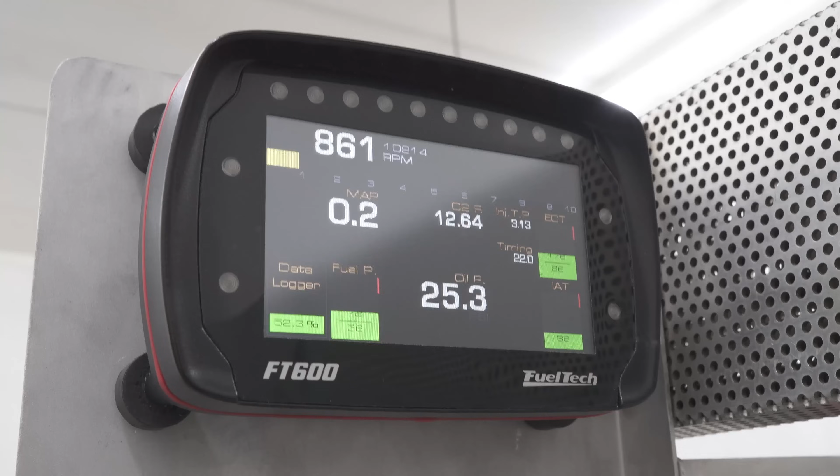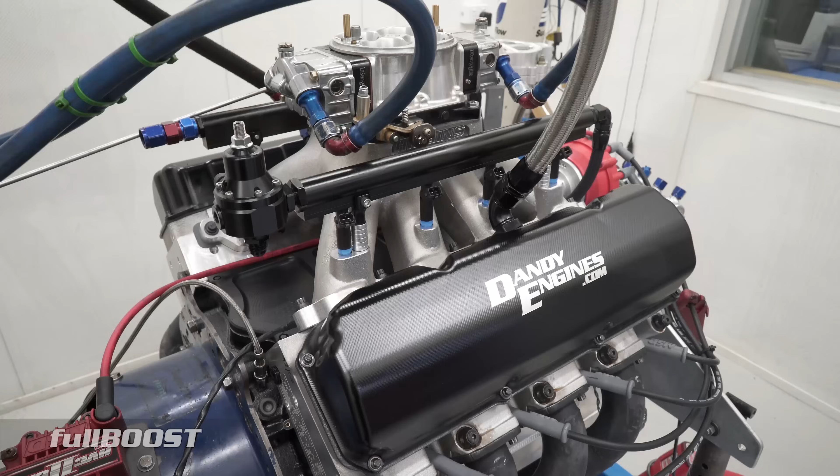Frank, we've done a few of these high output small block Ford engines here at Dandy Engines. Tell us about this combination and what we're doing today. It's no different to our run-of-the-mill 800 horsepower small block Ford. We just ran it in with a carby, and we wanted to make a quick video to show people how easy it is to put on an external computer EFI and wire it up.

It's not that daunting, and anyone with a little bit of know-how at home could probably do this themselves. That's what we thought we'd show you. It can be plugged in and have the engine running within an hour. It's a bit easier on an engine dyno. Of course, but it's not that hard to plug in, and we'll show that in the video.

We're going to be using a carby style inlet system still with the EFI. We're not switching to a fancy manifold, just a throttle body, and it doesn't have any fuel bowls or nothing. So it's basically just going to let the air in, and the TPS will read that.

Now the objective here isn't trying to make more power, it's just about showing how easy it is to convert, and obviously the advantages you've got with running an EFI system. We just want to show people how easy it is to remove a carburetor, plug the fuel system in for EFI, and then show an EFI system being plugged in.

All right, well let's just run it up now quickly with the carburetor, and then we'll show some of the parts we're going to put on the engine. Let's do it.

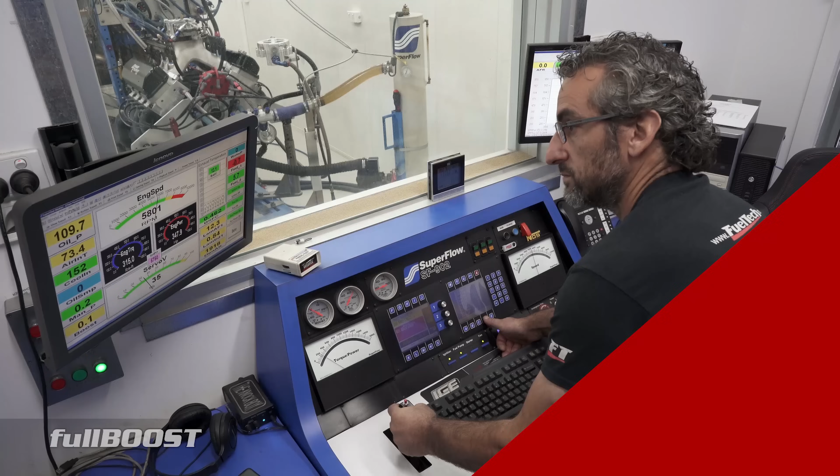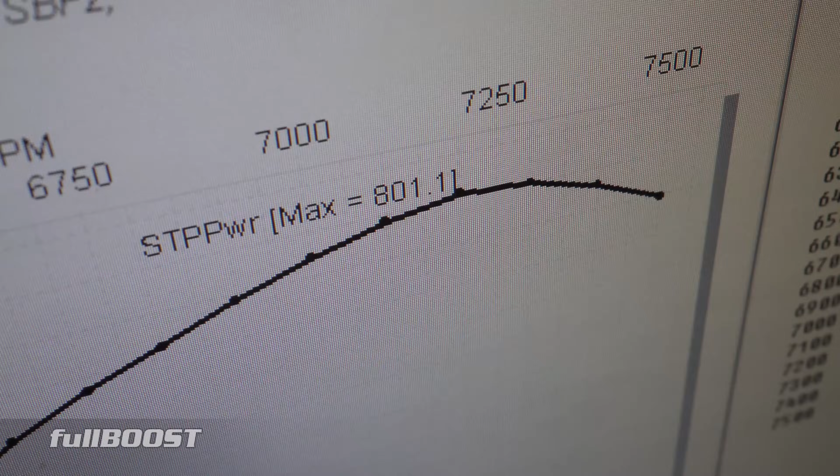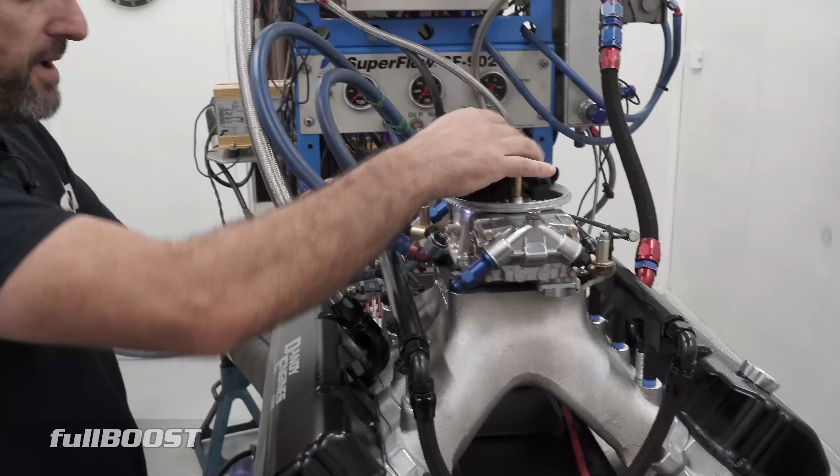So we just did that run with the carby. We weren't chasing anything, it was just really running the engine in, pretty much the first or second pull on the engine. It's about where it should be. Like I said, we're not trying to make power, we just want to show everyone how easy it is to plug a harness in.

Now obviously we've saved a bit of time because we've already got the manifold ready here. So Frank, just run through some of the parts we're going to be using today on this engine.

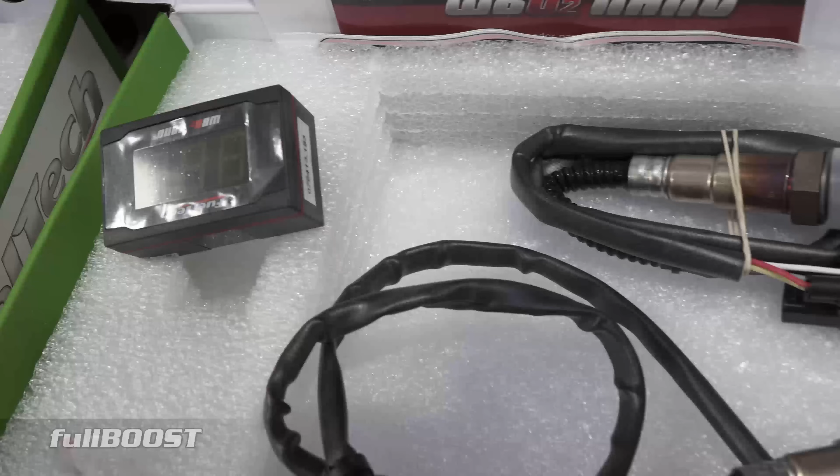Well, we have a pre-made harness that's already terminated for all the injectors and all the sensors. Then we have wideband nanos, which are basically air-fuel ratio readers, and they convert the signal and send it to the ECU for data logging.

We've gone with the FT Spark on this one, so we don't have to run an MSD box or nothing. It just simplifies the whole system.

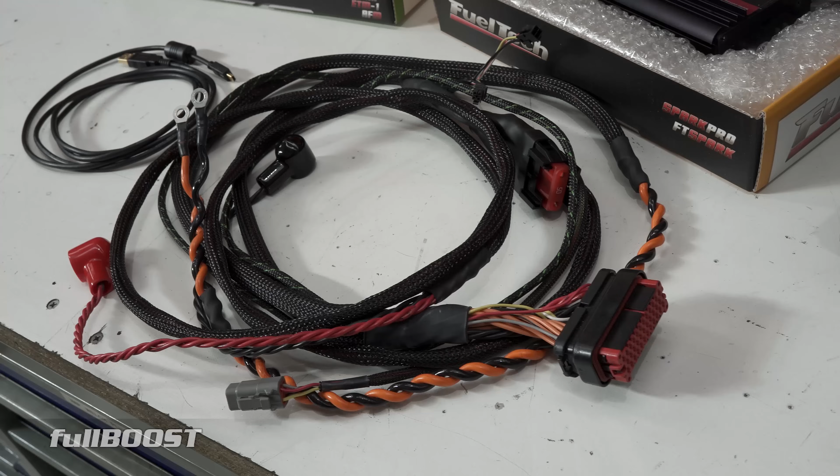And the FT 600, that's a choice of the customer. Depending on the customer's needs, you don't need to go for the highest end product. No, you can start with a 450, it just means it's got less inputs and outputs. And then the 550 will have a few more again.

And here's our throttle body. Basically we're going to remove the carby, and we've still got the same butterfly combination, we just plug it in with a TPS and away we go.

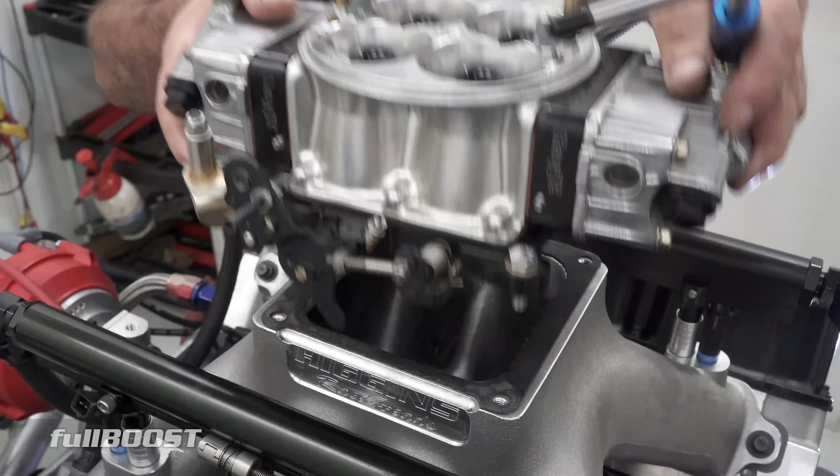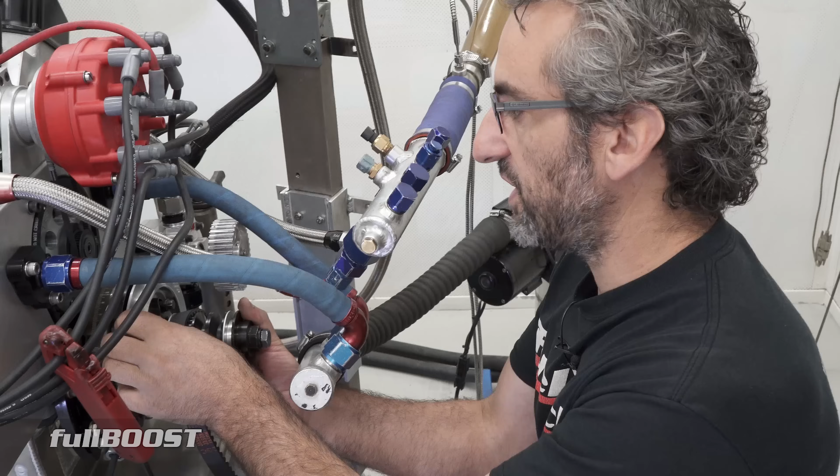So what we're doing here is we're going to sync, or basically set the reference up so the computer sees 50 degrees on the balancer, so we can sync them all together and adjust the timing, so the timing will be synced on fire up.

So basically when we get this off, which normally just falls off, there you go.

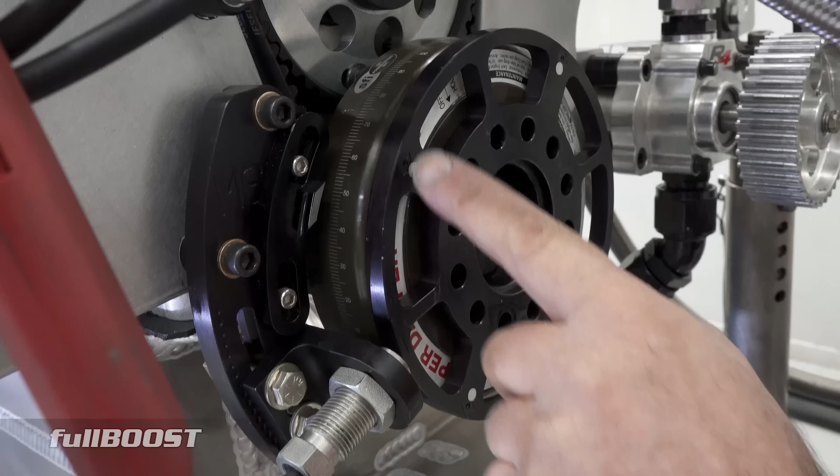At 50 degrees after top dead center, we need a magnet to line up. As you can see, we're in between two magnets. That's the closest magnet now, so we're going to put it in place.

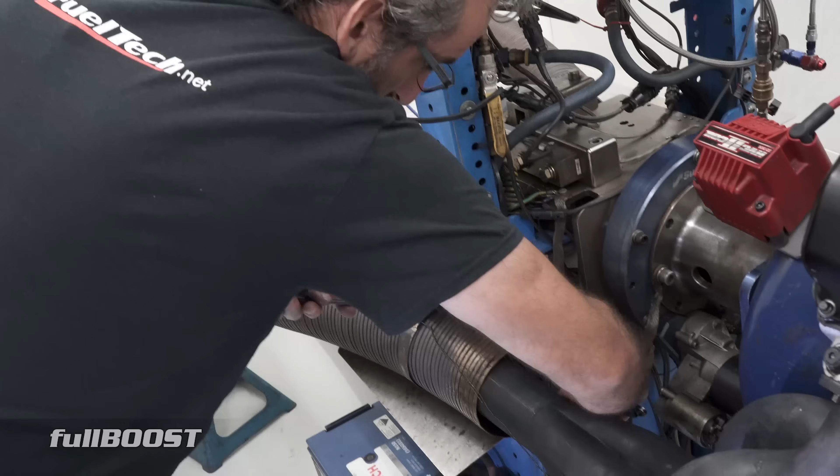So Frank, moving to EFI, we're going to have to put in an O2 or a couple of O2 sensors, yeah? Well, minimum you just need one, but in this case we're going to put two because that's what comes with this kit. We're just going to remove the carbureted one and add the EFI one so the unit can read it.

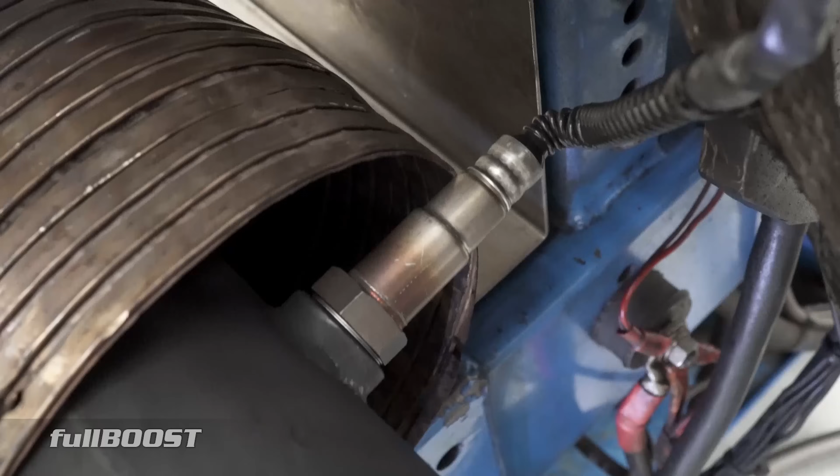Got a few wires there, mate. Yeah, it looks a little untidy until you get it all apart. It certainly looks more daunting than it is, doesn't it?

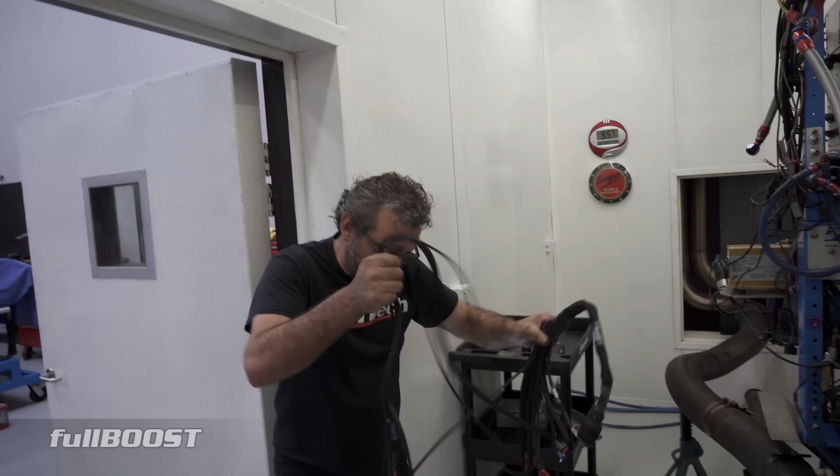No, but everything's terminated. So this is what we wanted to show you, how easy it actually is once you unpack it and unwrap it. Probably one of the easiest harnesses that you can plug in yourself. We've had a bunch of customers wire up their own cars, and they've enjoyed it because now they understand where everything goes and what it does.

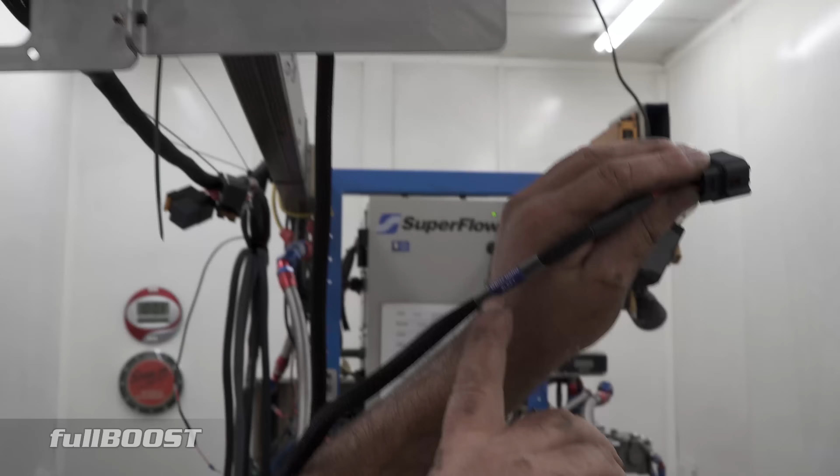So basically we're going to pick the, there's an A and B. So we have a left and a right, which is labelled on the actual harness, so it's pretty much idiot proof. Put that in there, plug that in there.

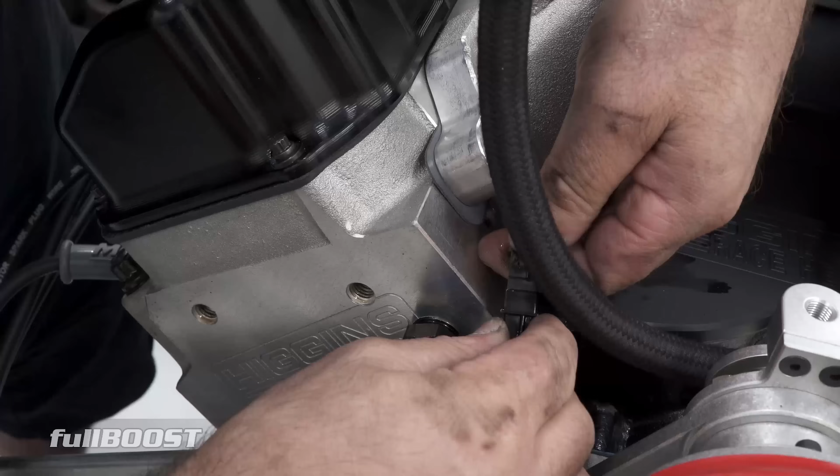So we have a crank trigger, we'll run through the manifold. So that's an FT Spark. That's basically the replacement of that big old box.

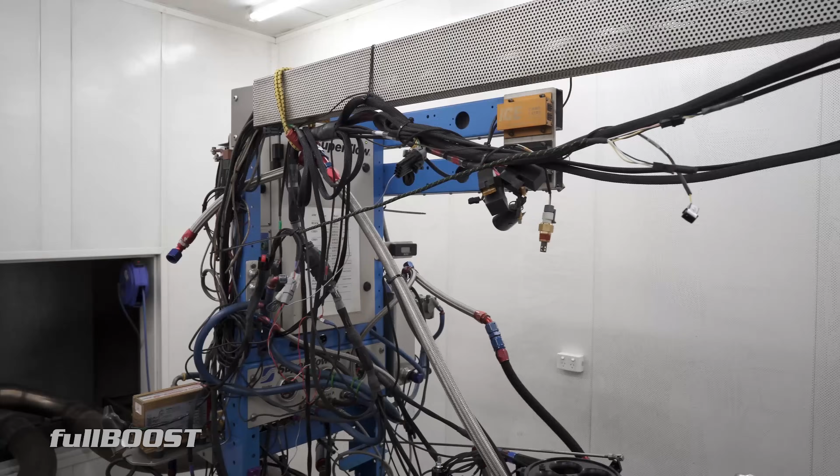So Frank, we've got the whole harness hanging up here. Now it does look like a lot of wiring, but we're not obviously using all of it today. Do you want to just point out what you need to connect up just to get this thing running?

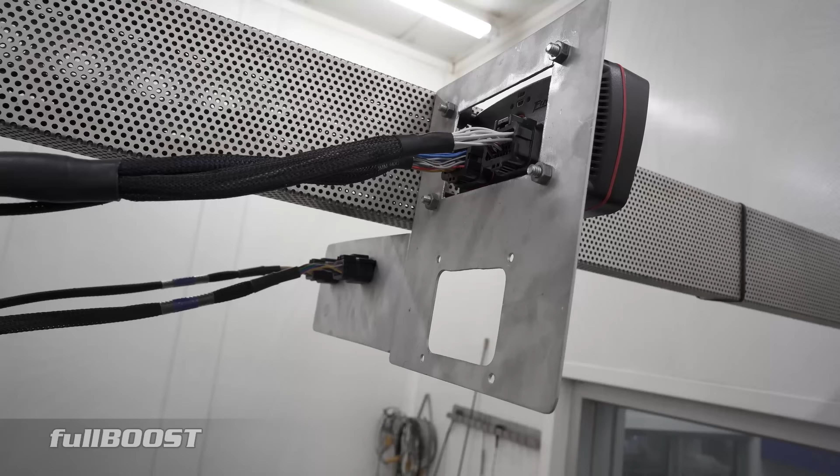So we'll start off with up here at the ECU. There's two plugs, plugs A and B, in the back of the ECU. Then you have the two nanos, which are labelled left and right, so they're plugged in now. They're your wide bands. Then we plug in air temp sensor.

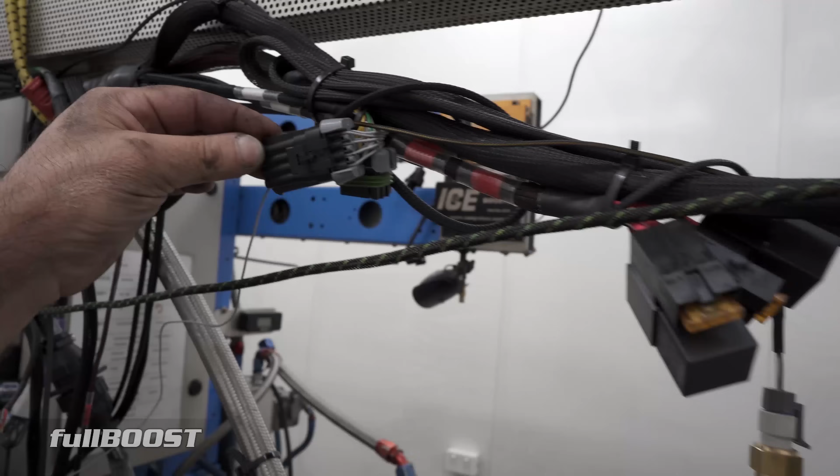This one here is just showing it's using one output to trigger the spark. And then you have the most important one, an ignition wire, 12 volt ignition for that from the dyno. And I'm using it, this is the dyno, 12 volt. We're going to turn on the actual ECU and the FuelTech spark box.

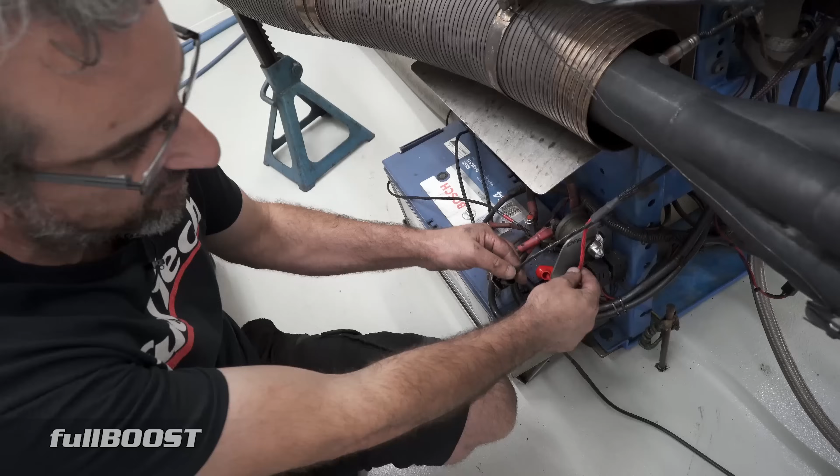Then you have basically battery power, so you have a red positive that runs all the way to the battery and a negative. Same with the FT Spark, they have their own power supply. FT Spark has two wires going to the coil like that. And keep in mind, it's only a single coil deal, so we're trying to keep it very simple.

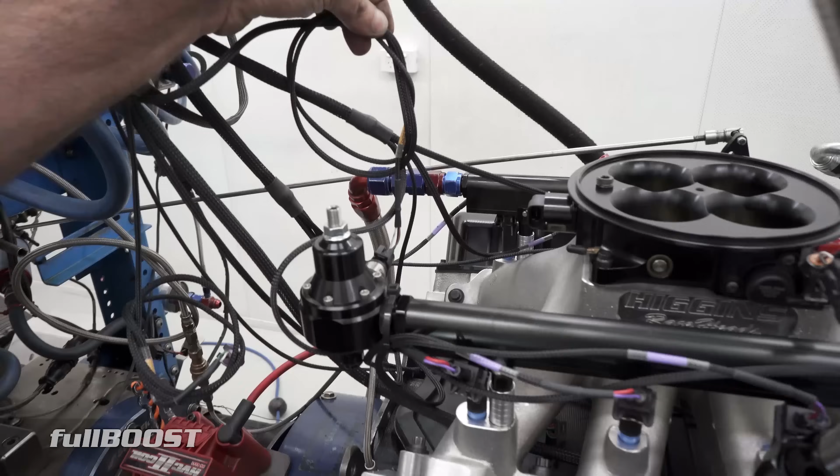We've plugged in a fuel pressure sensor, so we can data log fuel pressure. TPS for throttle position. 1, 2, 3, 4, 5, 6, 7, 8 injectors.

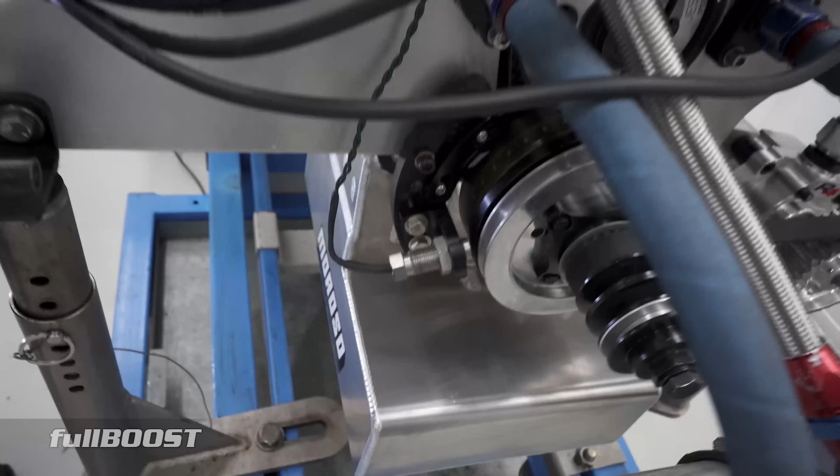And we've plugged in the other end of our nanos to the O2 sensor. And a crank trigger, so we've plugged the crank trigger in. We're not using a cam sync, we don't need to for this combination.

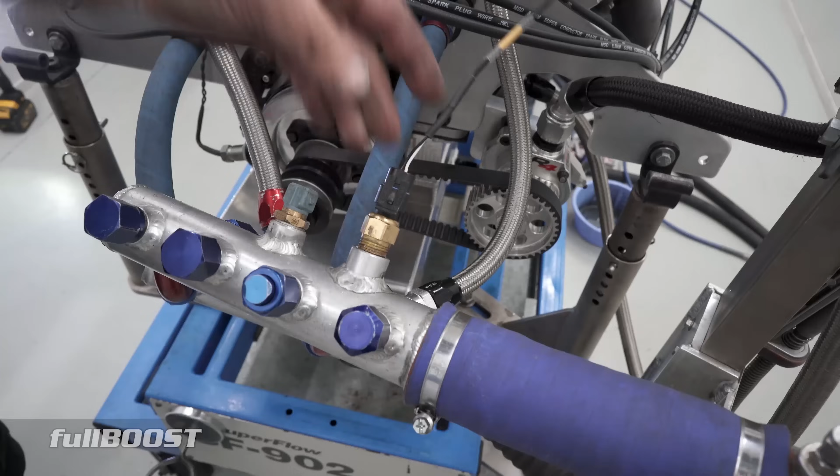And looks like you put in a water temp. And we've put in a water temp sensor and an oil pressure sensor, so we can data log everything. Even though the dyno has it, it's just nice to run it through the ECU.

The harness has its own fuses and relays. I mean, if you have fuses for other things like water pumps, and relays for trans brakes and so on, but all the harness to start the motor, everything you see was wrapped up in that harness.

And there's a lot of things we're not using. I've had to wind a lot of things back, like back pressure and so on.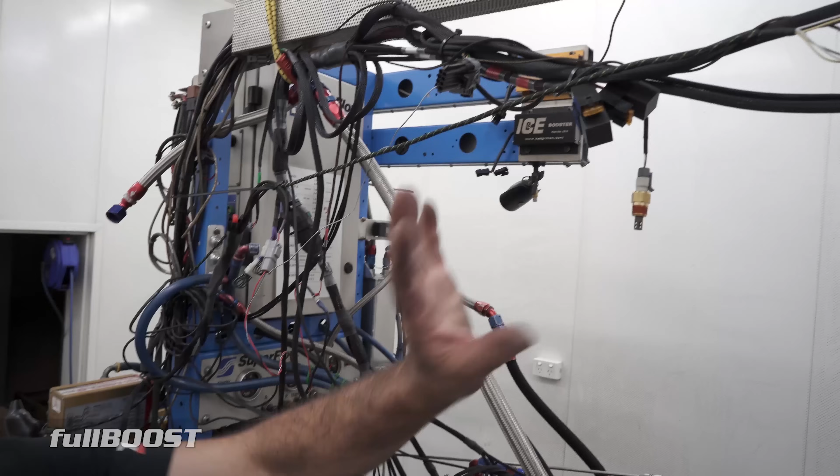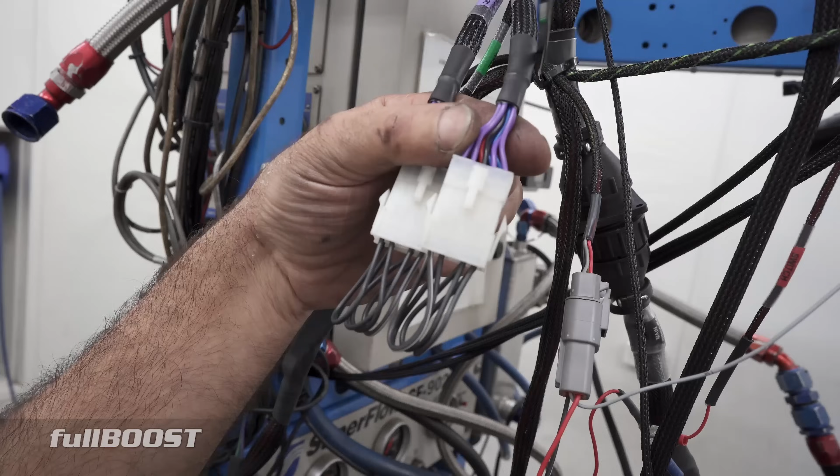This unit is strong enough to drive a high impedance injector. So because we're not using low impedance injectors, it comes with two plugs and you can just loop them. But if we're going to use a low impedance injector, like I use on our XW that makes 2800 horsepower, then we have like a 4 amp box to help amplify the power to the injectors.

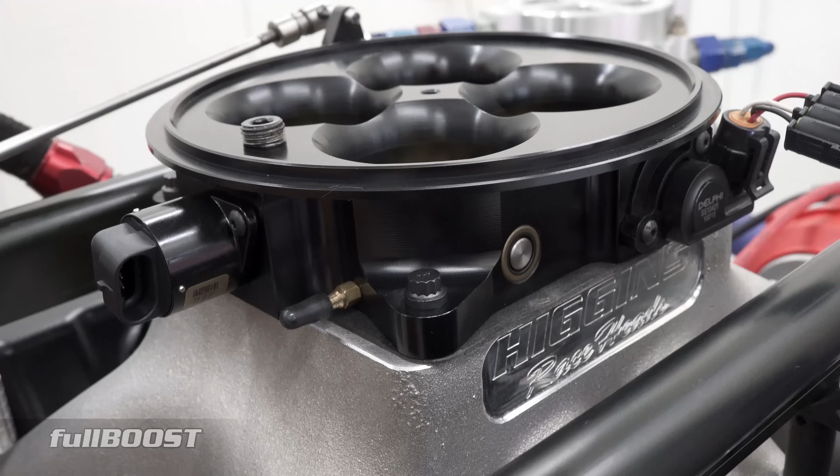Yep, so this is ready to start up. We're going to draw a map based off the carburetor numbers, how much fuel the engine used, and we know the timing, so we should be able to load those two things in.

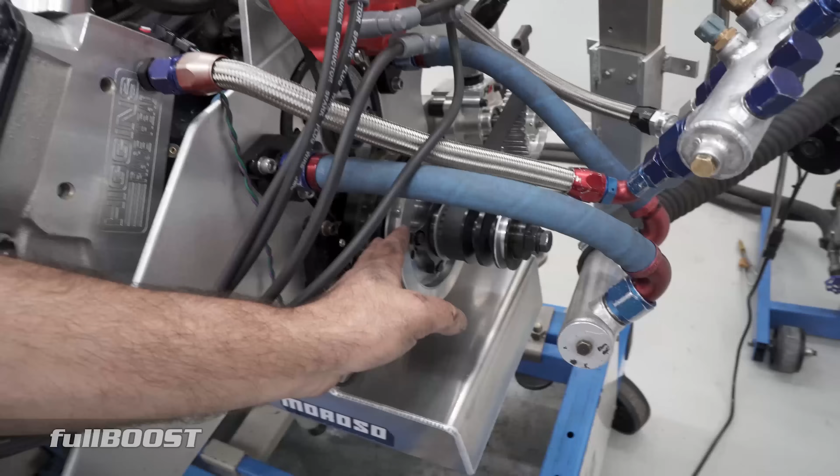Just allocate that one wire to ignition number 1 on the outputs, and we're going to make sure our timing syncs up. Basically we changed the crank trigger before from a conventional MSD box set up at whatever timing, 25 degrees we were trying to shoot for.

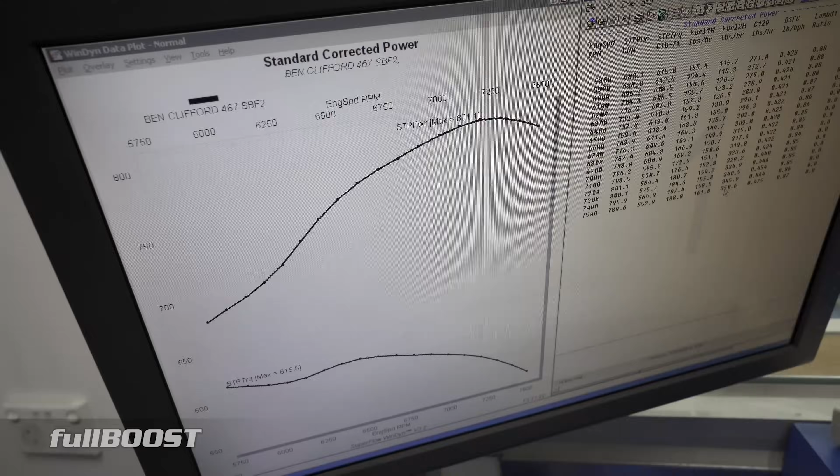Now we've lined it up with 50 degrees and we're going to sync the timing in the ECU, so 20 degrees in the ECU will be 20 degrees at the balancer. When we made 800 horsepower here, we used between 330 to 350 pounds an hour of fuel. That gives you a reference point to start with, showing how much fuel the engine used to make 800 horsepower. With the FuelTech, what we like is under the fuel map we can go pounds per hour.

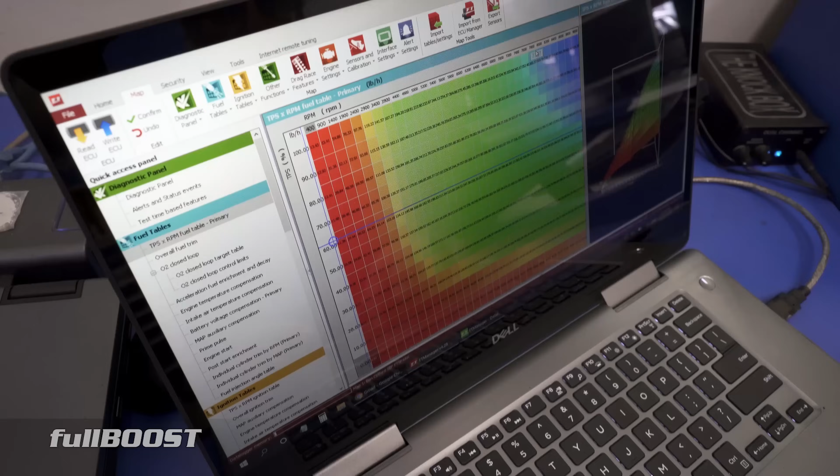At 7,500 RPM, we've put about 360 pounds of fuel at 100% throttle as a starting point. It should be pretty close to what it was, and then we can fine tune it from there. I'm on closed loop, and the closed loop will correct me up to 20% if I'm out.

We've done the same with the timing. I know this engine combination likes about 21 degrees, so I've put 21 degrees in the actual ignition map.

We should be able to make a run without sitting here holding certain RPMs for hours on end, beating up on an engine. I can go straight into a run like I did with a carburetor.

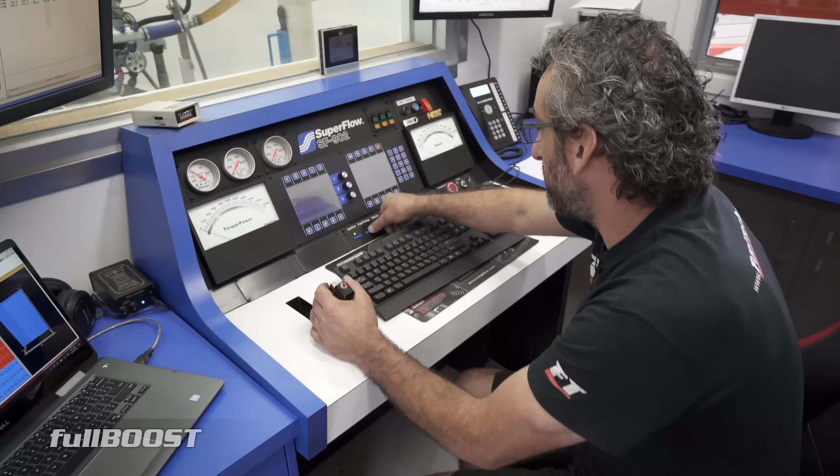All right, well let's fire it up. No problems. But before we do that, we just got to sync the timing. The nanos are still warming up.

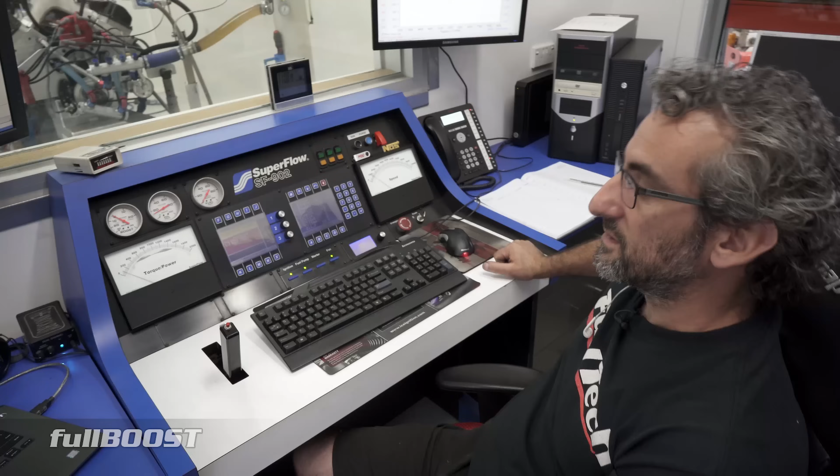That goes to show you that the map we've got is pretty close to starting up down here. We've got enough fuel numbers for it to idle.

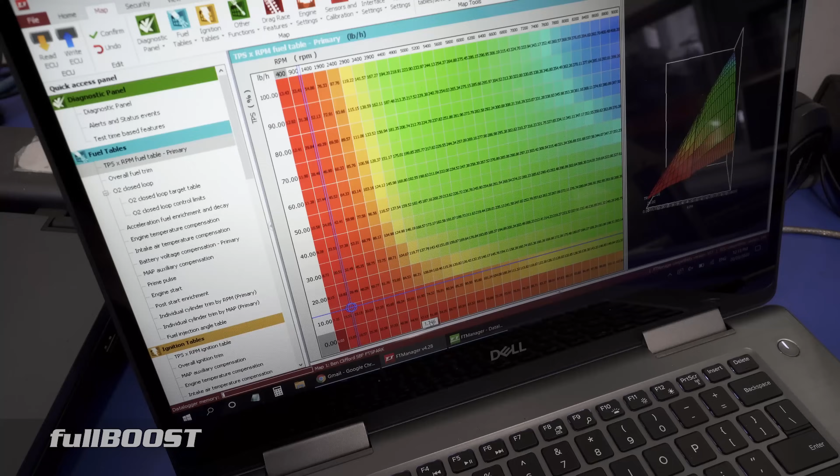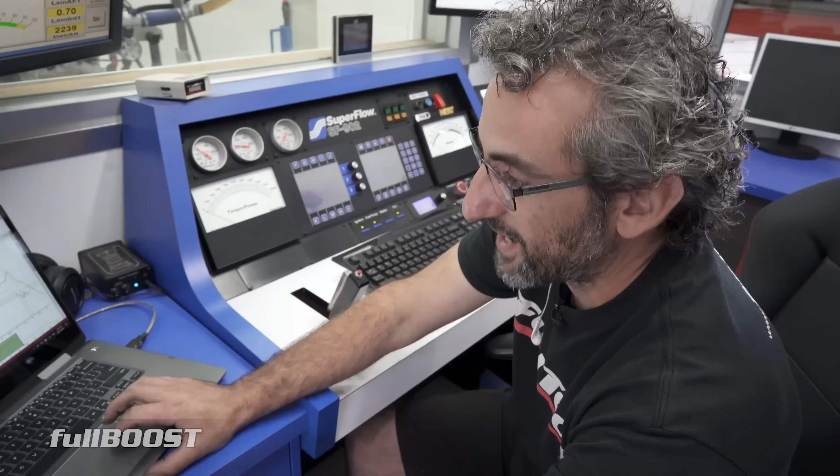What were you doing there? Basically all I've done is I've just wanted to check at wide open throttle what the air fuel ratio was. It's easy now because we've data logged that with a carby, before we didn't have that. So we're just going to pull the log out and check that the fuel pressure's right, the oil pressure's right, and the air fuel ratio is correct for the target.

Basically, that orange line is us opening the throttle, and it shows it goes to 100%, and the engine went back to 5700 RPM like we wanted it to. You can see coming on the throttle, my fuel map's a little bit out through there, and it shows the closed loop was taking 10% out.

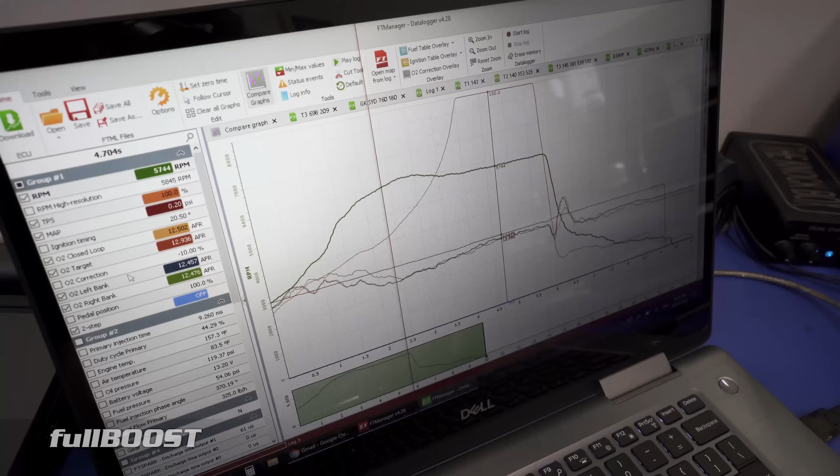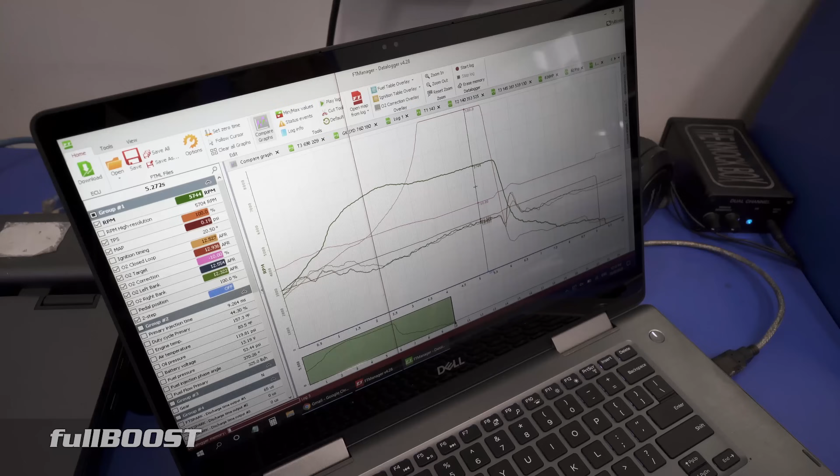If we turn on the correction, it was only pulling 5% as I was opening the throttle, trying to remove 5% of fuel from my map. But when I was at 100%, I still must be 10% off the actual fuel numbers, so I'm a bit too rich to say.

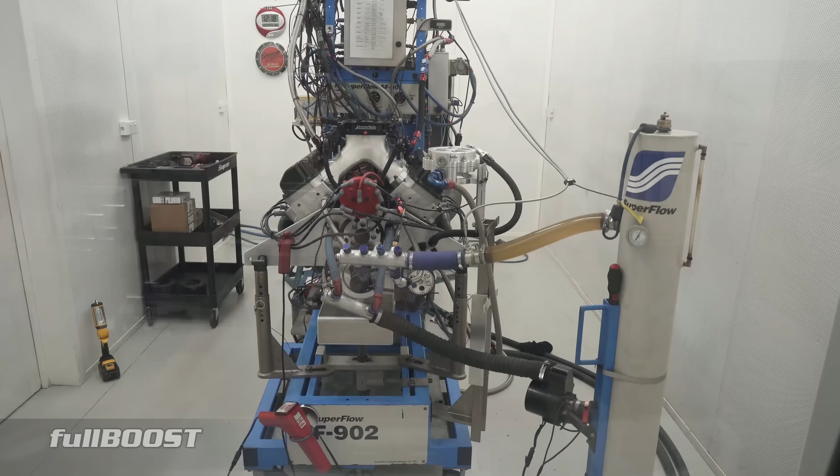Ignition timing was smack on 20 degrees where I wanted it at that RPM. Oil pressure was good, a little high, and fuel pressure was spot on.

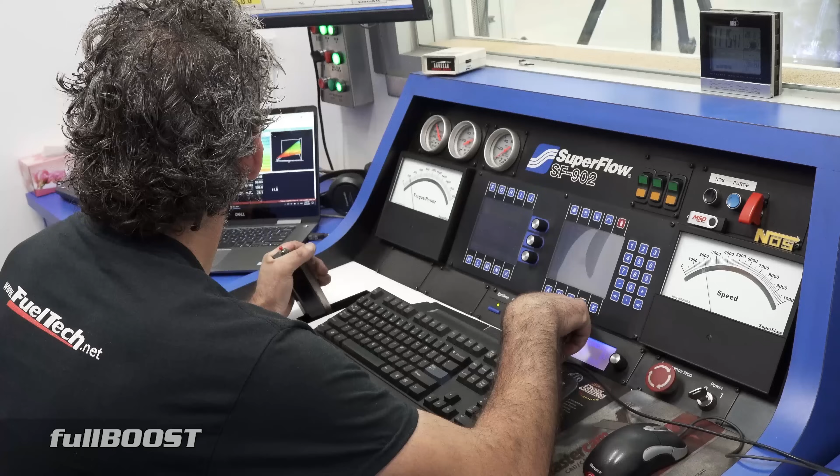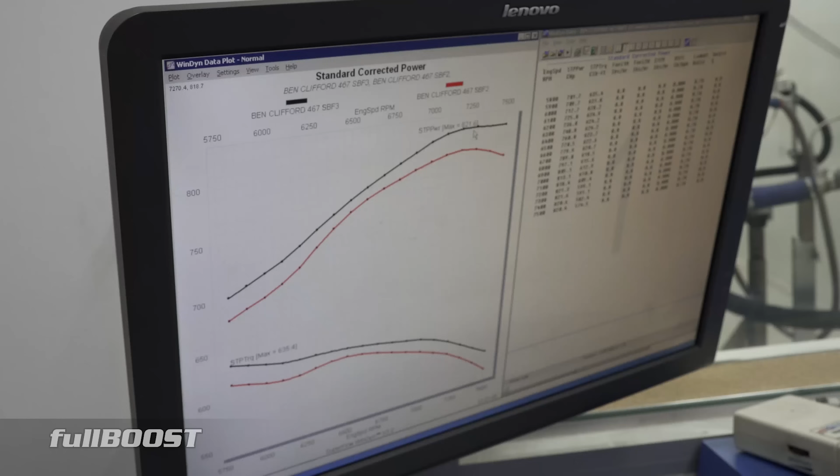And that's us pulling 2 to 3 degrees of timing out yet. So now what we can do here is bring up the log and just confirm that the engine wasn't trying to use more fuel.

So someone could say, oh yeah, but they must have already messed around with it, you know. I didn't know you were going to take that.

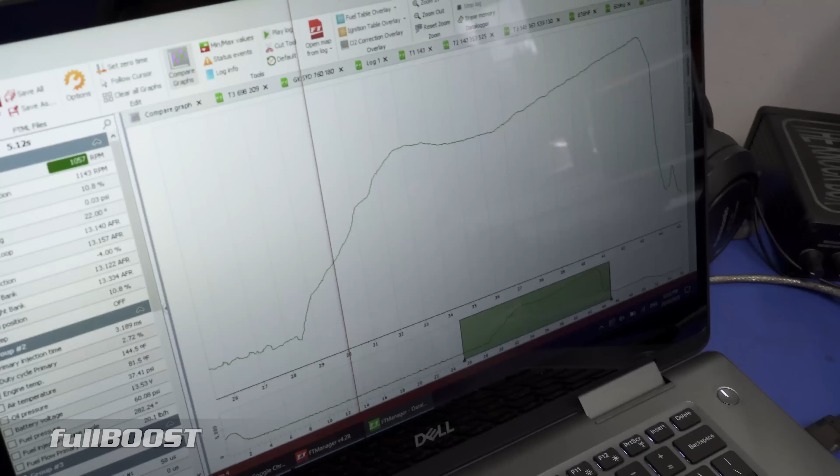Both carby and fuel map have both been run on one of these engines. Yes, so this is a good comparison to have a look at here. These two lines, if we turn everything off and just turn the engine RPM on, and the left and right O2 sensor, and my target, what I was asking for.

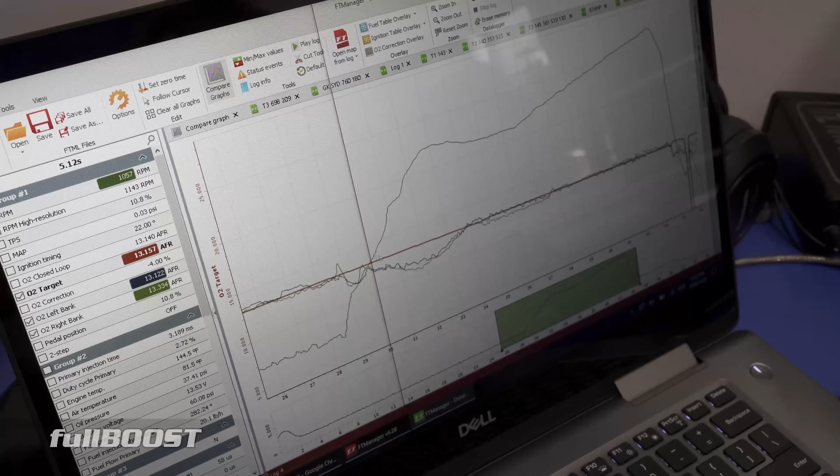The target is the heavy line, and it goes to show, if I turn the TPS on so we can see the throttle opening, I've still got some work to do opening the throttle. It's a bit dirty through there, the engine goes really rich. But as soon as we're on 100% throttle, the O2 sensors have met the target and it's only adding 3% of fuel.

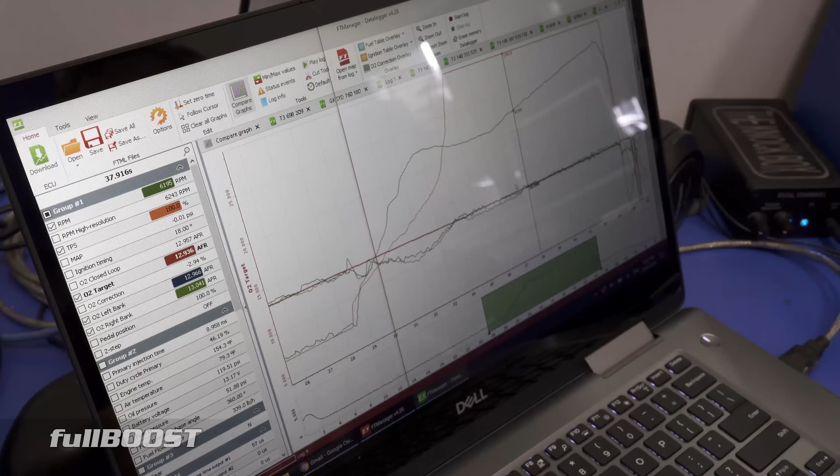So even if the O2 sensor was to go bad, it's minus 3% at that point. You're pretty much well within the ballpark of where the fuel map, it can almost be taken off closed loop. It's that close. But with a carburetor, it just doesn't allow me to draw a target from 1,000 RPM to 9,000 RPM, from 0 throttle to 100%. You have to compromise somewhere.

With a carby, there's no doubt you could change a bunch of air bleeds and intermediate, and then take the metering blocks apart and play with the metering blocks. But as you can see, within one pull, we just made more power.

We've had this thing running for like 1 minute, and we didn't have to sit there and individually chase each RPM and each position of the throttle. If I wanted to trim the fuel curve, I just got to go back to the log, split the screen, so I can see the log and the fuel map in the one.

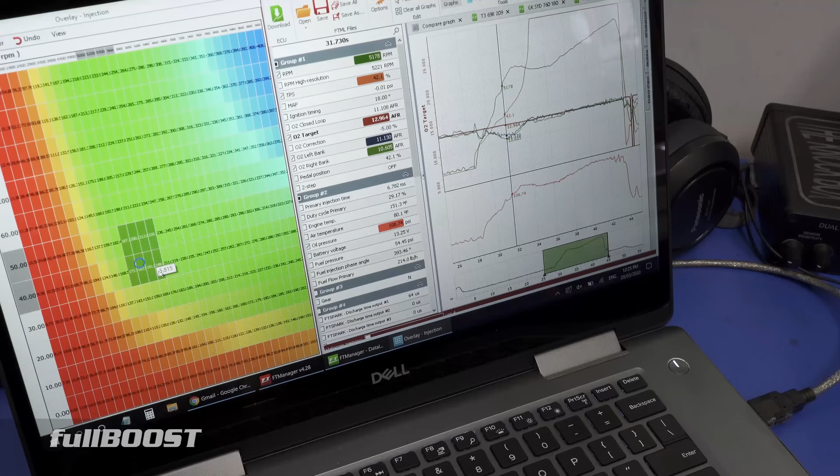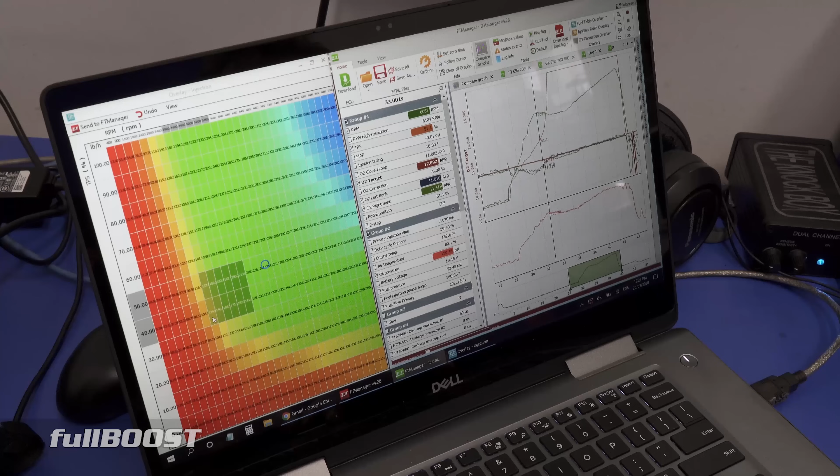Where I was telling you I was rich coming onto the throttle, I can now find that spot, highlight it like that, and I can see right there it starts to get rich right in that large fuel cell, entering right there and goes all the way back. So I really need to grab from there to there, and I can now multiply that number by the percent I'm too rich by and make another pull, and it should get a lot closer.

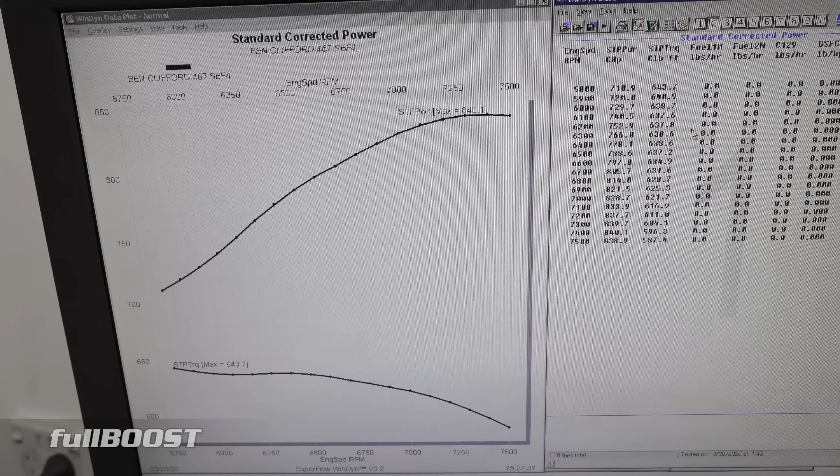So Frank, we just did another pull, 840 horsepower, pretty easy. What did you change to get that? We just added 1 degree of timing. Yeah, it goes to show you it's still got a bunch to pick up through timing. And this is still running on pump 98.

You were saying earlier, if you went to a more exotic fuel, you don't need to worry about rejetting. No, there's no rejetting. You just basically got to change your target to whatever you think the motor's going to like for an air-fuel ratio target, and it will add, providing I've given parameters enough to add fuel, it will add that much fuel if it needs it.

What do you think that's capable of just with a bit more fine tuning? I know a lot of people would say, look, you could fine tune a carby. Of course, that is 100% true, but at some point you're going to have to give up something. You could be whoever you want to be, but you will never have the drivability of what I've seen over the last 10 years with what we've done with the FuelTech over a carby.

This engine will make 900. I can guarantee you by the time you put a vacuum pump on it. Oh yeah, we've filmed a few of these making well over 900. It's already making at 7,500 RPM nearly 850 horsepower on pump fuel, and I've still got a couple more degrees of timing to go before it runs out.